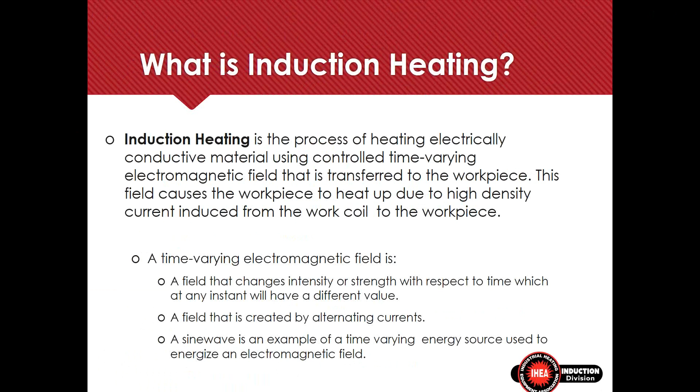So induction heating is the process of heating electrically conductive materials using a controlled time-varying electromagnetic field that is transferred to the workpiece. This field causes the workpiece to heat up due to high-density current induced from the work coil to the workpiece. A time-varying electromagnetic field is a field that changes intensity or strength with respect to time, which at any instance will have a different value. A field that is created by alternating currents. A sine wave is an example of a time-varying energy source used to energize the electromagnetic field.

The workpiece, conductive material, can be both ferrous and non-ferrous metals. Some non-metals can also be heated with induction. Some examples include graphite, carbon composites, and conductive ceramics.

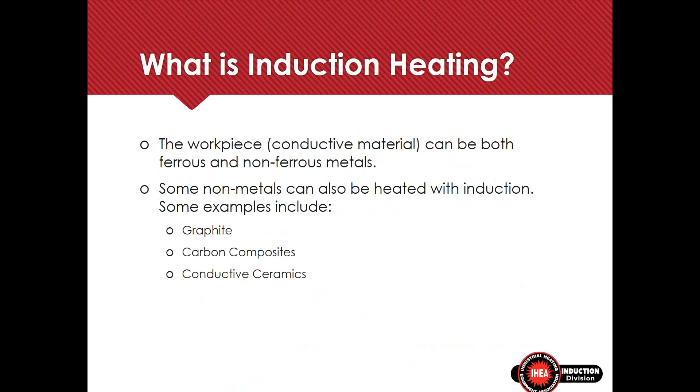There's two forms of heating that make up the phenomena of induction heating. One is hysteresis heating. It's friction caused by molecules in a ferromagnetic material switching poles at the induced frequency. Think of a bunch of small magnets flipping from north to south very rapidly. This only occurs in magnetic materials, so above the Curie point hysteresis disappears. The primary form of induction heating is Joule heating, I squared R heating. Interactions between the flowing currents and the workpiece giving up some of their kinetic energy when the flowing current collides with the material's atomic ions. The increase in kinetic energy develops into heat, thus energy is shifted from the electrical power supply to the workpiece. The contribution of hysteresis is small, such that for all practical purposes, the I squared R losses is the only mode that electrical energy is transferred into heat for induction heating.

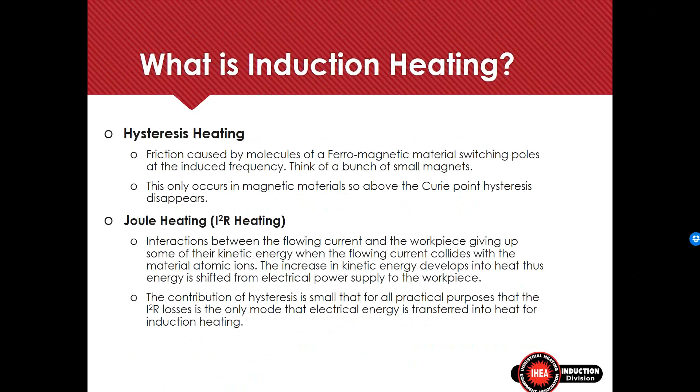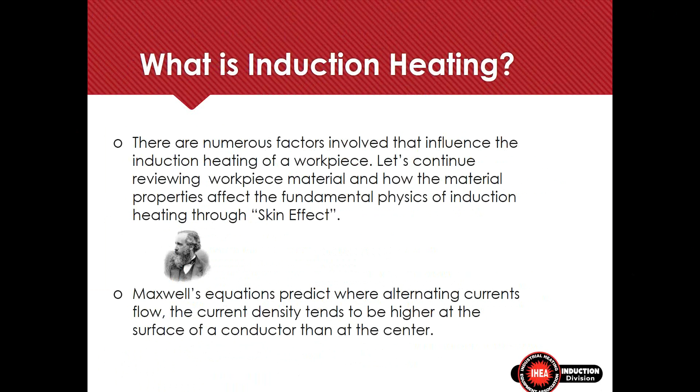There are numerous factors involved that influence induction heating of a workpiece. We'll continue reviewing workpiece material and how the material properties affect the fundamental physics of induction heating. This is commonly referred to as skin effect. Maxwell's equation predicts where alternating currents flow, the current density tends to be higher at the surface of a conductor than at the center.

Properties of a conductor that affect skin effect are the conductor diameter, the electrical properties, resistivity, and the magnetic properties, permeability. Furthermore, with alternating current, the current density tends to be higher at the surface of a conductor than at the center. Therefore, the higher the frequency of the AC, the more intense the skin effect. With a higher frequency, the current tends to crowd more towards the surface of a conductor, or in the same sense, to not penetrate as deeply.

This is commonly referred to as reference depth, and reference depth is an unavoidable consequence of skin effect. The reference depth is the wall thickness of a theoretical current, which we commonly call a sleeve, in which an equivalent power to a solid cylinder is developed, with driving coil current, outside diameter of the workpiece, and material properties being equal.

So the equation would be D equals 3160 times the square root of rho over mu f, which is the resistivity in ohm inches.

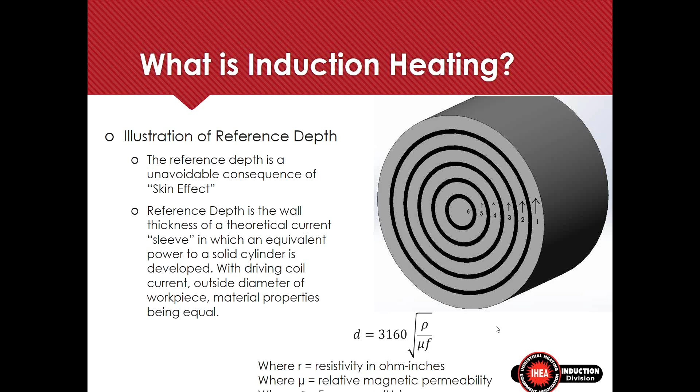Skin effect and reference depth, though related, vary inversely with one another. The greater the skin effect, the shallower or lesser the reference depth. The lesser the skin effect, the deeper or greater the reference depth.

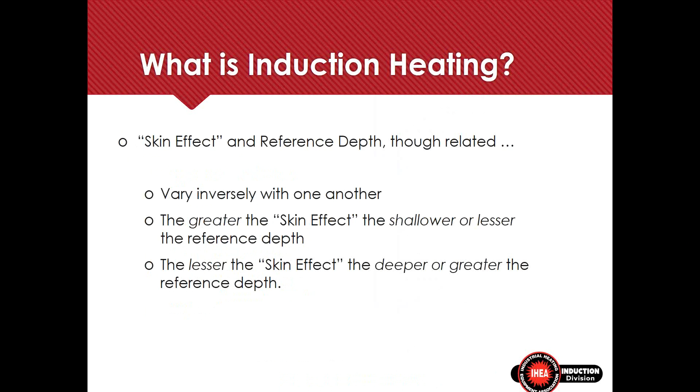So now we're going to talk about the induction heating system components. The workpiece is the part to be heated. The work coil conforms to the workpiece areas and transfers electrical energy to the workpiece. Interconnecting conductors transfer electrical energy and consist of either buswork or water-cooled leads.

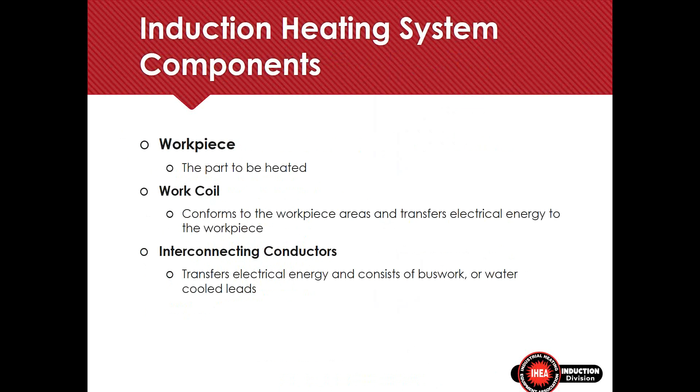A heat station, also called a matching station, contains reactive electrical components that build up the electromagnetic energy that drives the work coil. The power supply converts utility power to single phase high frequency power for the heat station. A cooling system is needed to cool the power supply, heat station, buswork, and coil.

Types of cooling systems that are typically used are chillers for low power operations, closed loop recirculating water systems for power supply cooling, and evaporation cooling systems typically used in higher, larger installations.

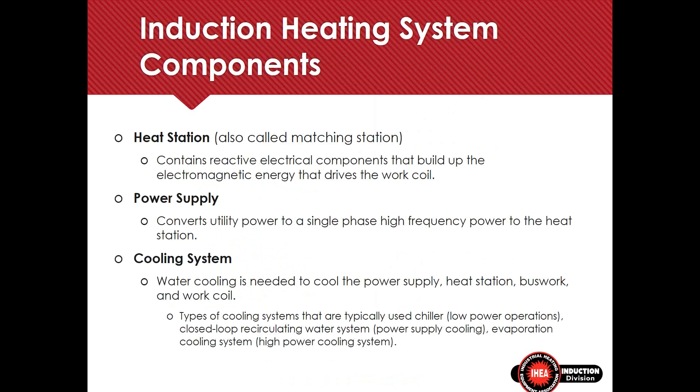So you have your three-phase AC coming in that gets converted in the power supply to a single-phase high-frequency output. The load matching circuit of the heat station then transfers that energy to the work coil, and the work coil transfers that to the load.

Applications: induction is used in a lot of different areas and industries. Pretty much every industry can utilize induction heating, but some of the general core competencies of induction heating are heat treating—for example, drive shaft components, pins, fasteners, fittings, gears, anything that needs to be hardened, tempered, or annealed.

Brazing and soldering, example would be valves, electrical components. If you need to braze a contact onto another component using dissimilar metals, you can see a lot of examples there where it's copper and brass, or copper and a silver contact.

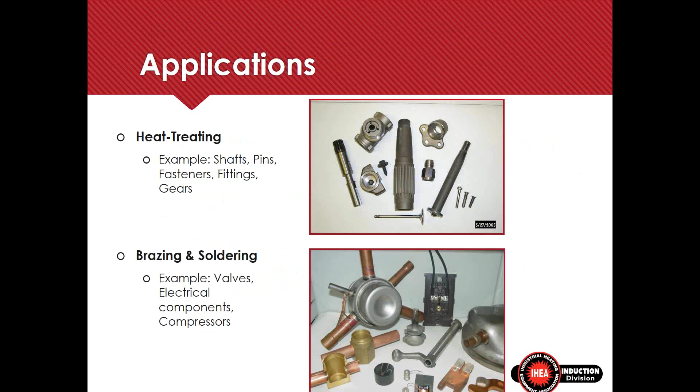Hot forming applications—that would be heating up the part and then forming it into a die. Examples for that would be compressor rods, cable, bars, and structural components.

Melting, so anytime you need to make molten metal to form into something—examples would be electrical connections, engine components. Casting.

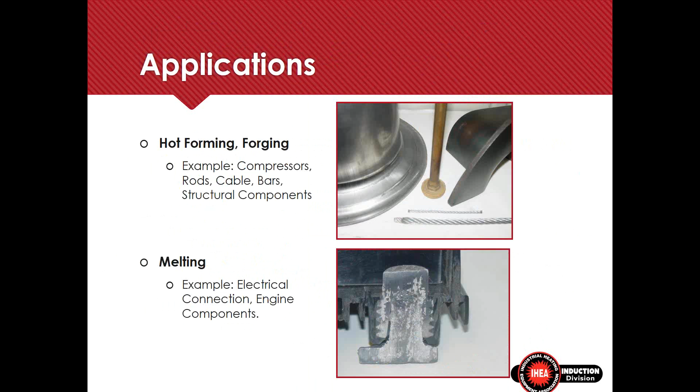Bonding or heat staking. Heat staking would be if we heat a metal or a conductive component and then press fit it or form it into a plastic component—that would be a good example of heat staking. Then it fuses the plastic around the conductive component. So lights, shafts, medical instruments, fuses are some examples.

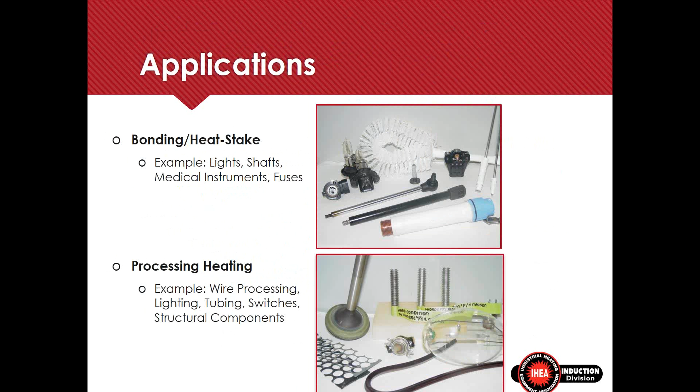And then process heating—if you need to preheat or do something like that prior to another application, post or pre. Examples would be wire processing, lighting, tubing, switching. Some people would utilize it to burn the insulator off of a wire in a reclaiming process, since they just want the copper wire. They don't need the insulation, so they physically burn off the insulation using induction.

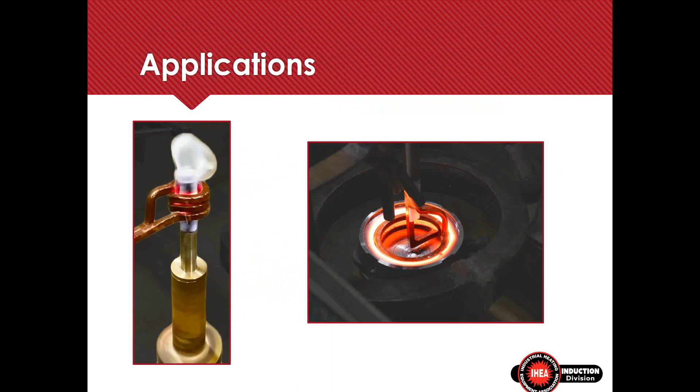So there's various amounts of applications that we always deal with on a daily basis. At this point, Girish is going to talk about some of the applications that they've done over the years, and we have done some as well over the years. So at this point, I'm going to hand it over to Girish.

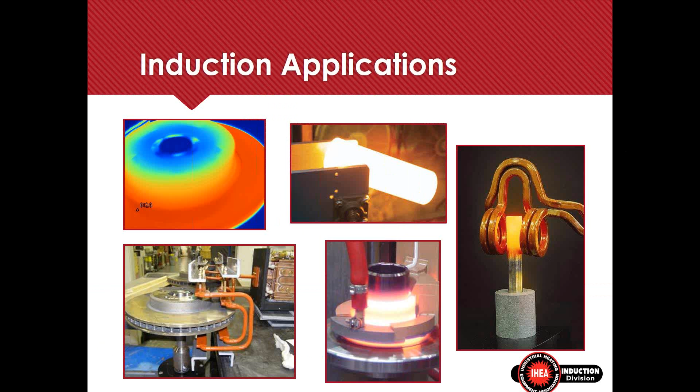So why do we use induction? We just talked about repeatability and reliability. Induction is also used if you need precision in terms of the delivery of the heat.

Obviously a process that can deliver precision can also deliver generalized heat. But if you wanted to heat just a section of the part, just a small portion, induction is a good candidate for that kind of heating. Induction is also extremely fast—1,000 degrees C temperature rises can be expected in a matter of seconds if needed.

It is also extremely energy efficient because the heat is produced directly into the metal. It does not have to rely on media to transfer the heat. That's why induction is energy efficient. Compared to an oven, gas, or flame type process, induction would be much more efficient given the situation. Induction is also clean.

There is no residue that comes off the heating device. Only thing that might come off is whatever might be on the part you're heating. We already discussed repeatability. But when you look at the entire process, induction proves to be more economical than any other heating method available in a lot of cases. That is why induction is preferred as a heating source in many manufacturing applications.

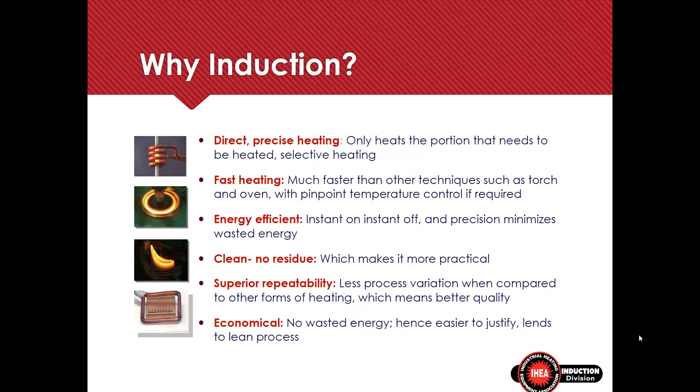So we have a lot of applications that induction is used in. There are numerous. My toughest job being in an applications laboratory is when I have to say no to a process. Everybody would love to hear yes—my sales guys would love to hear yes, customers would love to hear yes.

So there are a lot of applications that are good candidates for induction, and an equally good amount of applications that may not be good candidates. This is where the expertise lies, and this is what an induction heating supplier can offer when we evaluate your process.

If you consider any moving part—planes, trains, automobiles, ships—the basic building block for all these things is metal. Metal forms the skin, the wheels, the shafts. Everything in there is basic metal. And how does metal get produced? Believe it or not, induction is used to manufacture metal as well.

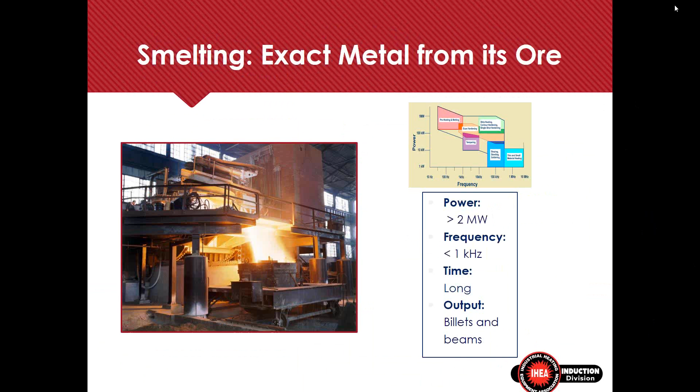The metal is again remelted and made into a special performance ingot. These ingots could be used for shafts, gears, cylinders, and depending on application requirements, they are alloyed with different manganese, carbon, sometimes lead, and other metals so it can perform the function needed. Once this melting process is done, you get this special alloy.

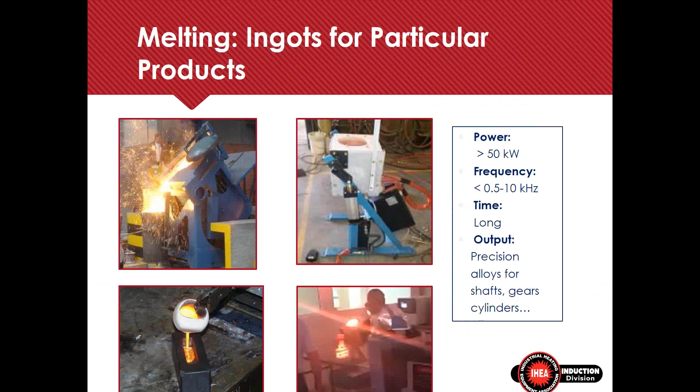Now the next process is forging, where the same metal is taken and formed into crankshafts and drive shafts.

The bolts, they're all made with induction because you can make them repeatably, you can make them economically, you can make them in high volumes.

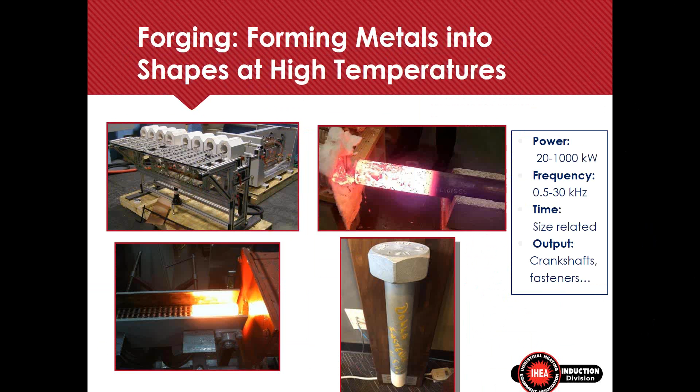Induction processes can also be set up as modular type setups. In modular type setups, you can have very high volume production without sacrificing the time to heat a particular part or without sacrificing product quality.

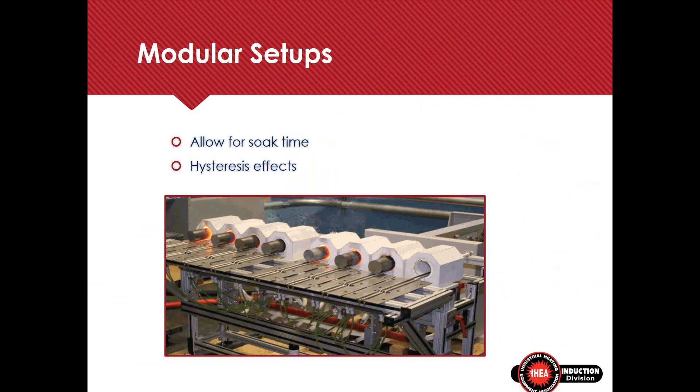Induction is also used for heat treating. Heat treating processes are numerous and they're used every day to make millions of parts in the automotive industry, in the aerospace industry, in the railroad industry. So all these parts have to be treated specifically to perform a specific function.

In the heat treating application, parts are heated to 1600 degrees Fahrenheit and above, and then quenched with a liquid quench to typically get the required hardness and ductility from the parts. A crankshaft, for example, needs to be very strong on the surface, but very ductile in the center. A gear, on the other hand, needs to be only very wear resistant on the gear teeth. So different processes require different recipes from the same induction heating power source.

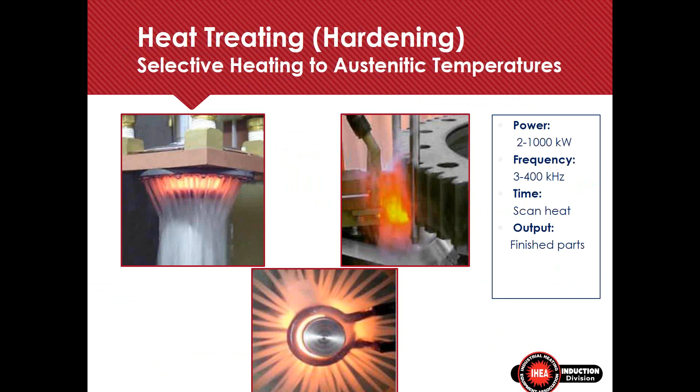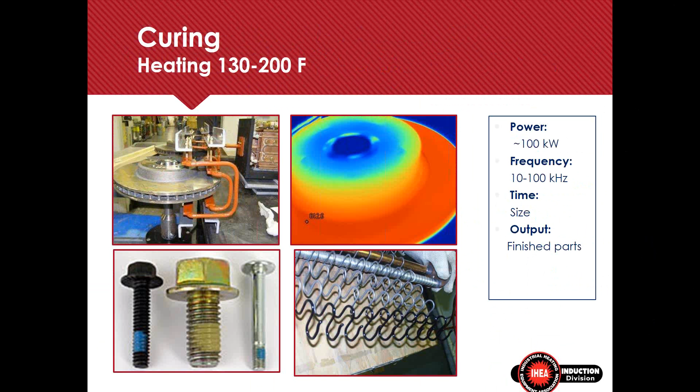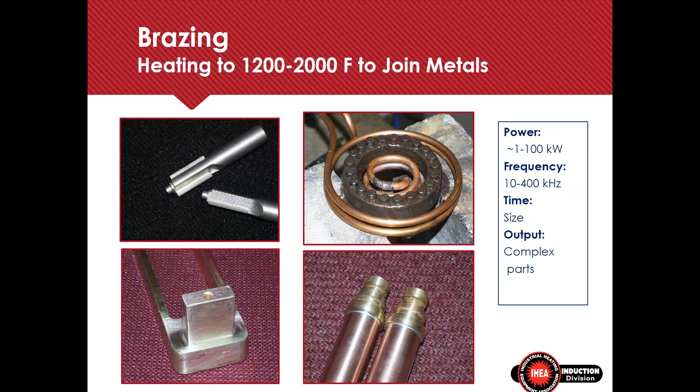Induction is also used to join metals together, joining similar or dissimilar metals, as the case might be. When you have to join metals, typically a filler metal is used to join these metals together. Depending on the use of these parts, the temperature required in the actual working of these parts, as well as the performance characteristics required, the process can be brazing.

Or the process can be soldering. Brazing and soldering are similar processes, but they occur at different temperatures. Soldering is a much lower temperature process, similar to soldering of your in-house plumbing copper tubes. It typically uses a lead or tin mixture, or in newer cases which are moving away from lead, just a tin and silver type mixture to join different metals together.

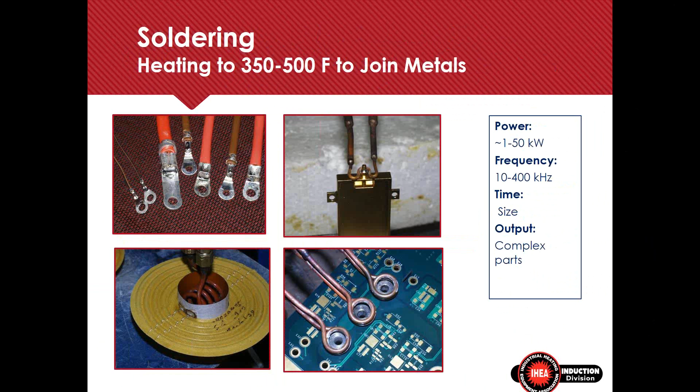So the power required to heat these parts also becomes smaller and smaller. As we progress from initial metal melting to more refined processes, you can see the power required is getting reduced. But if you notice, the frequency of performance is slowly creeping up. Frequency typically allows you to focus heat better and to heat parts in narrower, shallower depths, as Ryan was mentioning with his skin depth equation.

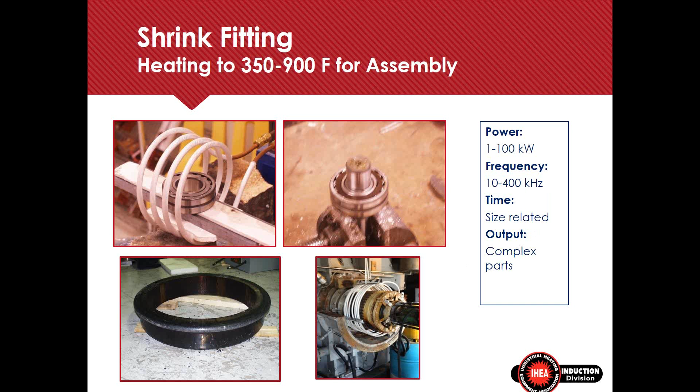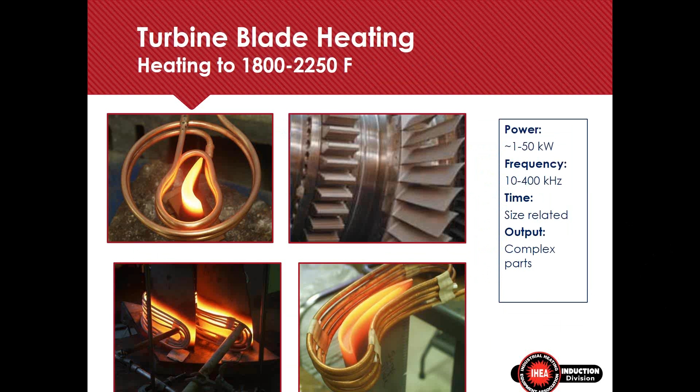So turbine blade heating is a very common application for induction.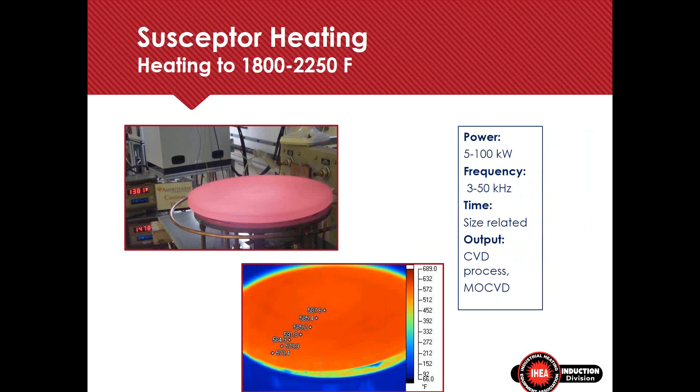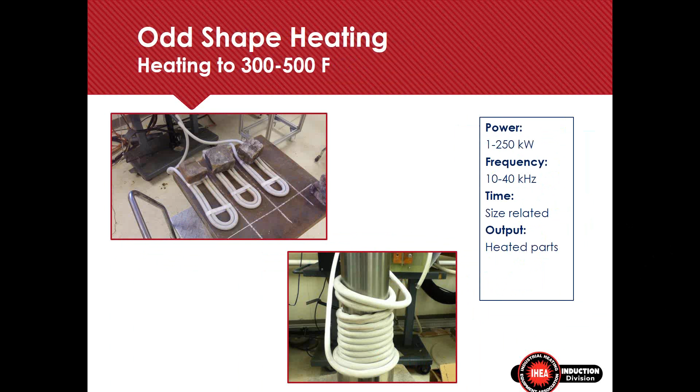Induction is also used for odd shaped heating. We do not always have to have rigid copper coils that provide the heating. Induction can be used with flexible induction coils that can be wrapped around parts, that can be made in custom shapes. Depending on the part that has to be heated, they can then be formed to fit the part.

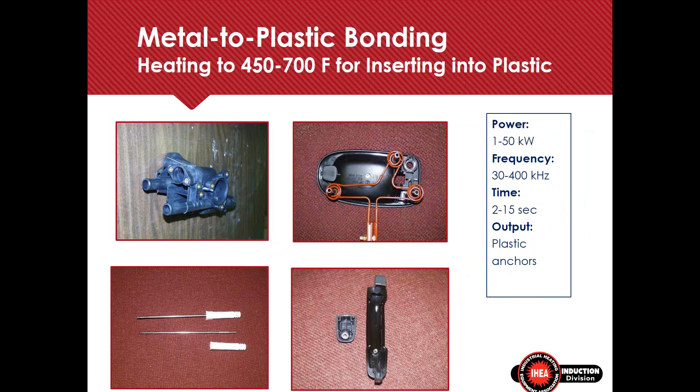The part here is pretty small, so obviously the energy required is small. So the power supply required to heat such smaller parts is much, much smaller. But the frequency required to heat the smaller parts is quite high.

Induction is also used in some atypical applications. Manufacturing of cartridges for ammunition is a typical application that requires the use of induction for any high volume production. When bullets are made, they're typically made 1 per second or faster. At that kind of speed, you need a heating method that can keep up. The heating method not only has to heat the part, but it's only required to heat a portion of the part as well. So going back to the basics of induction, induction is able to heat just a section of these parts as well.

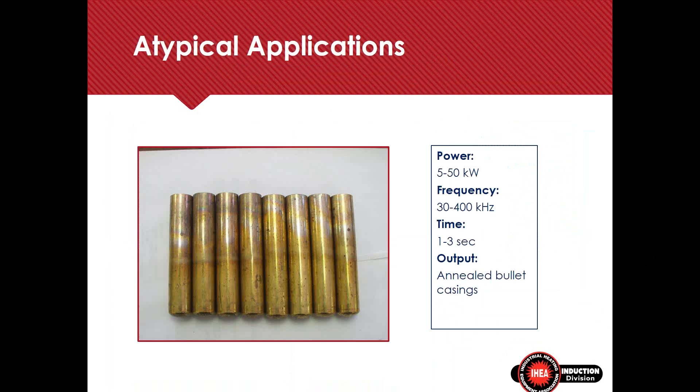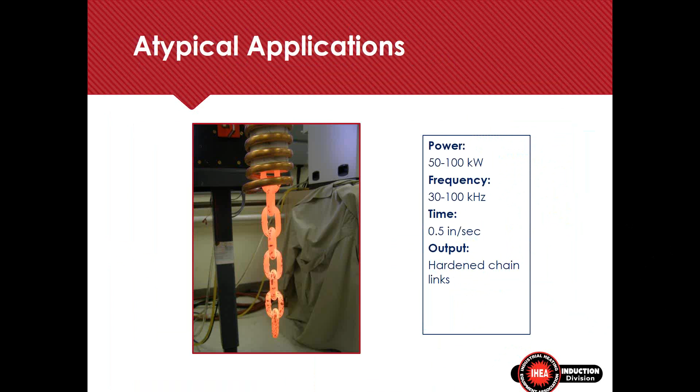Induction is used in some atypical applications like hardening or heat treating of chains. Chains are commonly used in heavy metal pulling, heavy part pulling, and they have to be extremely strong, because you must have heard that a chain is only as strong as its weakest link. We want to make sure every link is equally strong in a chain so that it can perform to its rated capability.

Induction is used in the manufacturing of chocolates. Again, if you think back, anywhere where you need to deliver heat in a repeated, precise, and very accurate manner, induction is a good candidate. So in chocolate manufacturing, the cookie that's inside the chocolate is basically made with induction.

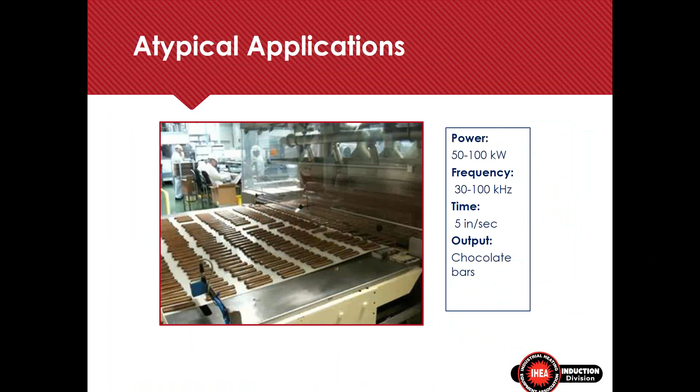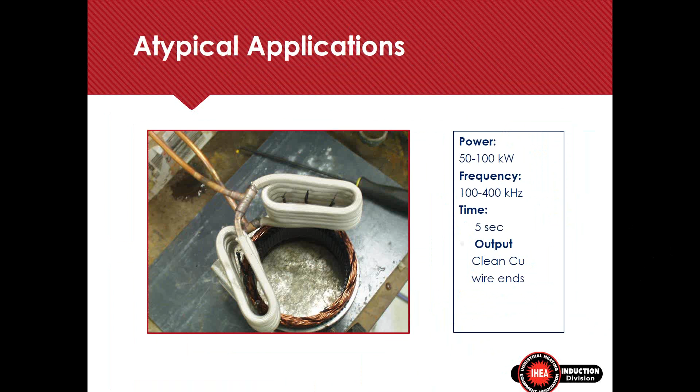Induction is used to burn off enamel of copper wires so that electrical connections can be made to these copper wires. All electric cars, all of the new motors, all of the rotating devices have copper stators and copper rotors, which is basically a bunch of wires wound together in a certain format to get the electrical energy transferred to rotational energy. So all of these applications at some point or another see the use of induction.

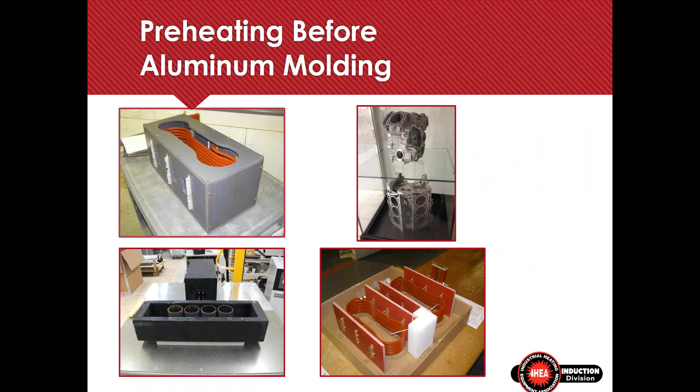Induction is used to make engine blocks for automotive cars. Engine blocks are typically aluminum, but the cylinders are typically steel. Where the piston rides inside an engine block, it rides inside a steel sleeve because steel is inherently harder and stronger than aluminum. As you can see, the shape and sizes of induction coils can be quite unique for this type of heating. You have a V6 type heating coil on the bottom right. The coils on the left show heating of just 4 cylinders for a typical V4 type assembly.

So we've talked about a bunch of different applications. I want to give a brief recap of what induction is so that whenever you think about heating, you think of induction as a possible candidate. Can't promise it would be a good candidate, but it deserves attention because of the numerous advantages it has. Induction systems can also control the temperature of the part being heated.

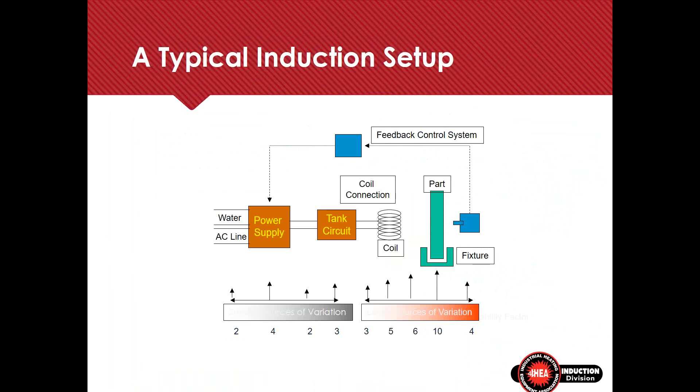On this slide, going from right to left, the picture on the right showed two pieces in blue. That's the feedback control system, which shows that you can measure the temperature of the part and then control the induction heating power supply to deliver energy at a regulated pace.

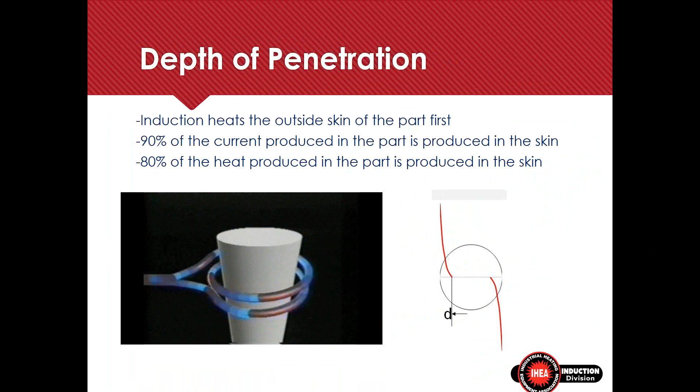This is my favorite slide. We talked about the skin effect and skin heating. Induction heats from the surface, but it also heats into the surface. Every time I present this slide, I remind viewers that come Thanksgiving, you cannot actually put your oven to a higher temperature and hope to get the turkey cooked faster.

Because in an oven, all the energy comes from the outside surface and goes into the meat of the turkey. But with induction, you not only heat the outside surface of the part, you also put energy into the thickness of the metal. This is a key distinguishing feature between induction and oven heating, or any kind of radiant or hot air heating.

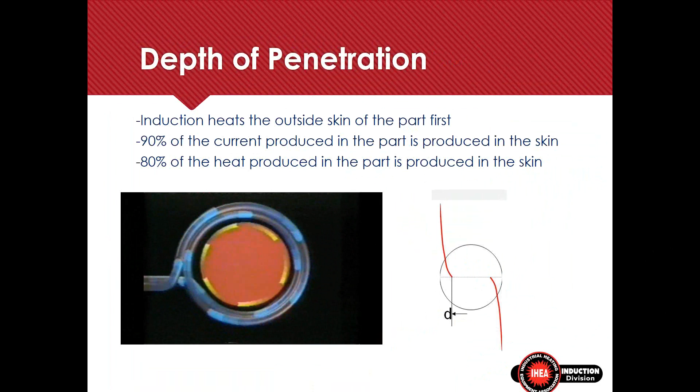So the frequency of operation of the generator can be used to our advantage, using different metals inside the induction heating coils to perform different functions.

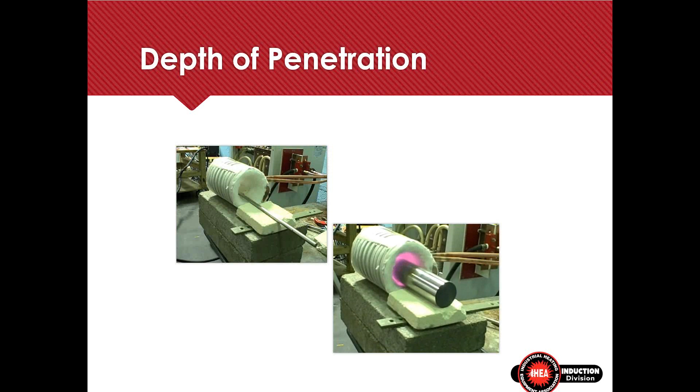There are also software packages available today that allow us to basically model the induction heating process before any testing or heating is attempted. This allows us to get a gauge of the direction in which we need to follow. It tells you the temperature on the outside skin of the part and in the core of the part.

And it's able to do it with much less time and cost, because we don't have to build anything. A person can basically simulate and model these things on a computer and then make iterative changes to optimize the design even before any physical work is done.

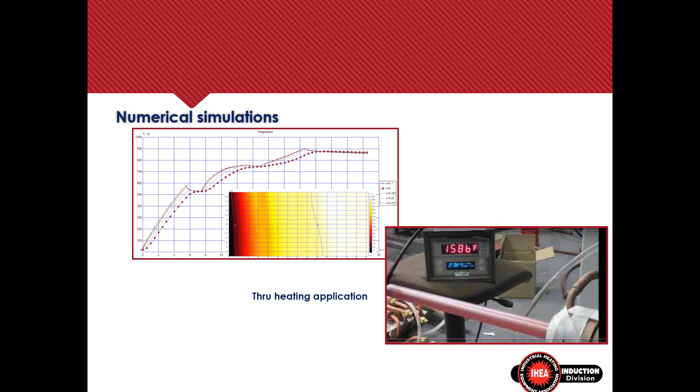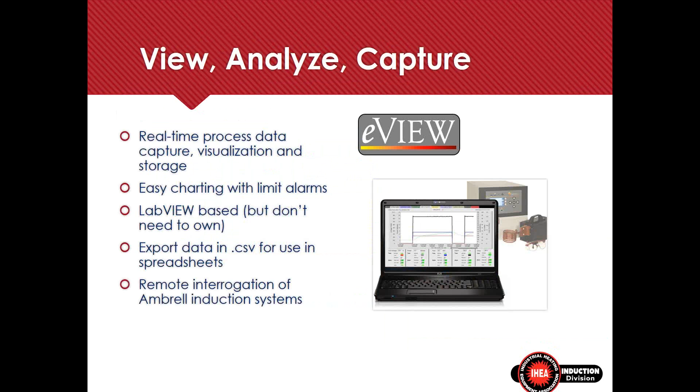All the data from the induction heating process can be viewed and captured in a computer to be able to analyze at the time of heating or at a later time, to make sure the entire production run was running through the SPC controls that were set up for that process.

This software is available. It basically allows one to put alarm limits, and allows everyone to download the data into Excel type formats. So somebody can go back and look at a whole day's run, a week's production run, or even a month's production run to check if the process is working favorably as designed.

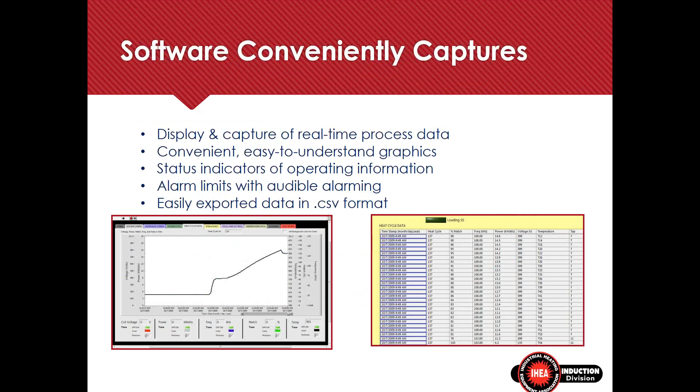That is all I have for today. Thank you very much.